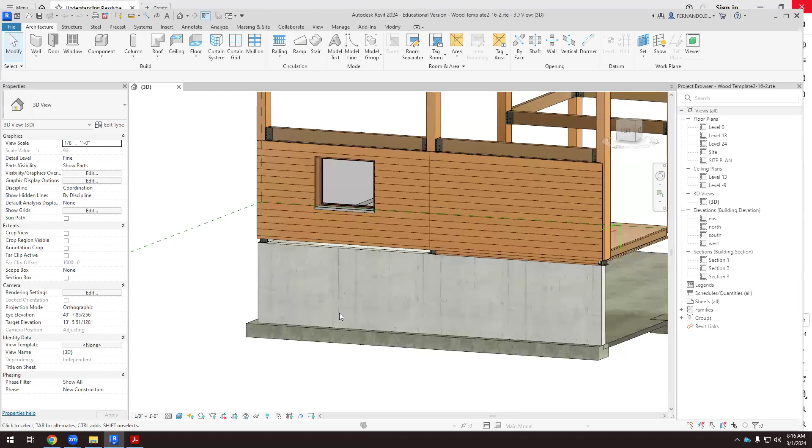This is where we finished last class. In this part of the wall, we didn't copy the floor. Of course, we need to copy this floor here because we added some details, so that we don't have this gap.

If we want to see what we did, we can always work with the section box. If we place the section box and drag it, here we can see all the elements that we have in this section.

Remember that this is the board. This wooden element is at the top of the concrete wall. That's the concrete wall, then we have this wooden element.

On this element we place the joists, the structural joists that are placed just on that element. So here we have the joists and they are resting on this wooden element.

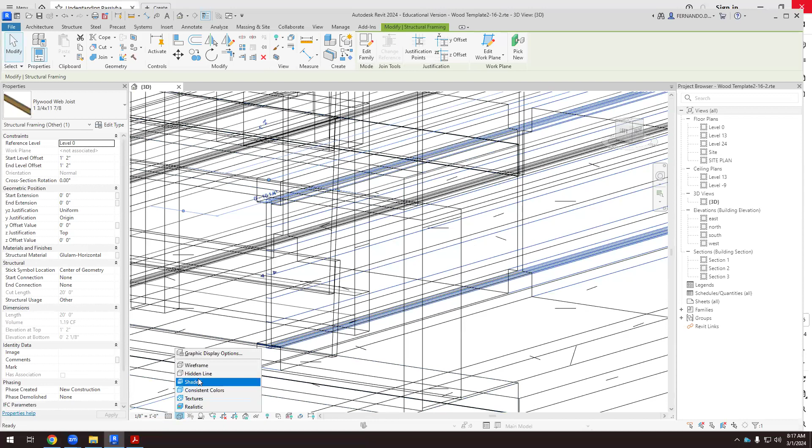Then what else? That's the cellulose. I'm going to use the realistic colors, so that's the cellulose between joists. And here we wrap the joists and the cellulose with this rigid insulation layer.

We have this rigid insulation so that we don't have a thermal bridge here. Then we cover the thermal insulation because it cannot be exposed to the outside. We cover this with this wooden element.

Then the wall, remember that we had the column, the glue laminated column. Then we have these horizontal elements that are nailed to the column. Between the horizontal elements, we have the thermal insulation.

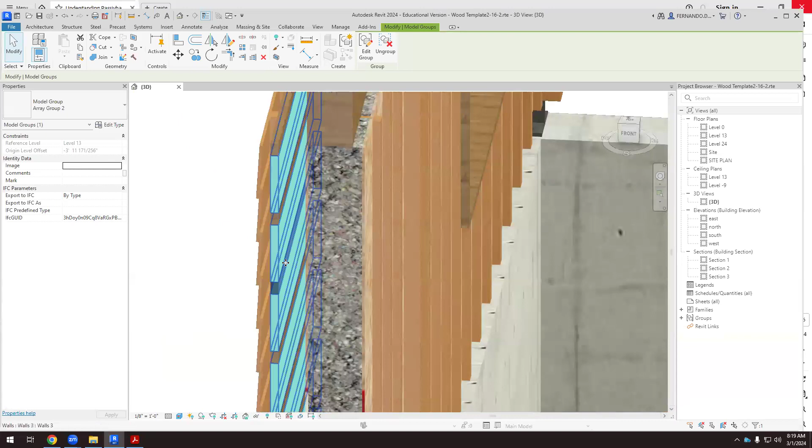With this, we prevent the thermal bridge from happening. If we look at the floor plan view of this, you see how the structural column is not in contact with the outdoor air.

So we have this thermal insulation element, which is not exposed to the outdoor air. We have this 2-inch thermal insulation, or 3 inches, I don't remember.

And then we need these vertical elements nailed to the horizontal ones. We have the air cavity. If you see, that's the air cavity.

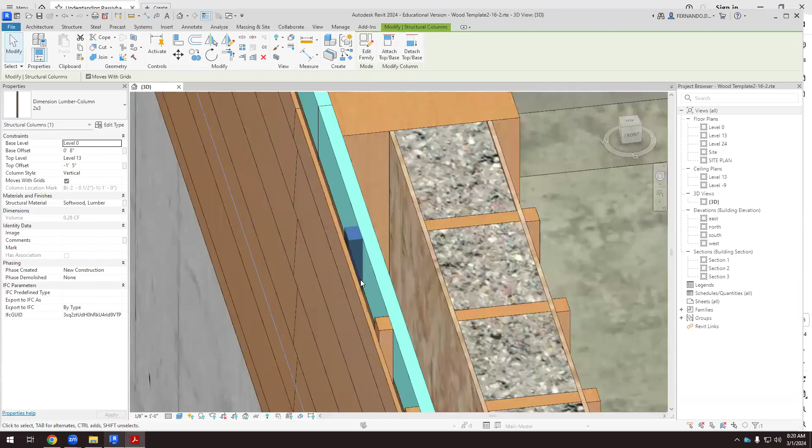Now we can nail the siding to those elements. In this case it's slightly different because the siding is vertical, so I have to nail the vertical siding to horizontal elements. In our case, we have created a horizontal siding, so we are nailing the horizontal siding to vertical elements. But the idea is the same.

We need something, and we can nail the exterior siding to that element. If we have something horizontal in the siding, this element has to be vertical. If the siding is vertical, then those elements will be horizontal. But it's the same idea.

So what do we have to do now? Well, first we should copy this floor, all these elements, to this part of the wall. If I'm copying only the floor, I can select all these.

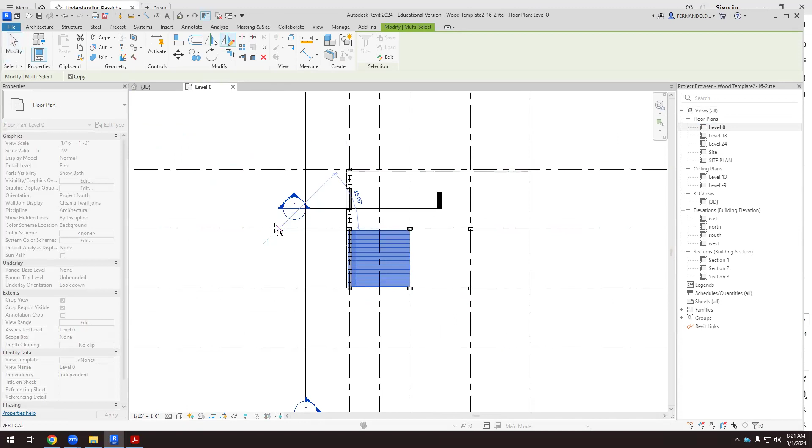Now, on level 0, I have selected all these joists and floor, and I can mirror this axis here. So now I have copied the floor that way.

There is a gap, so I have to fill this gap with another board. You see that we have a gap here, so we have to continue this gap. We need more thermal insulation, and we probably did this with edit extrusion.

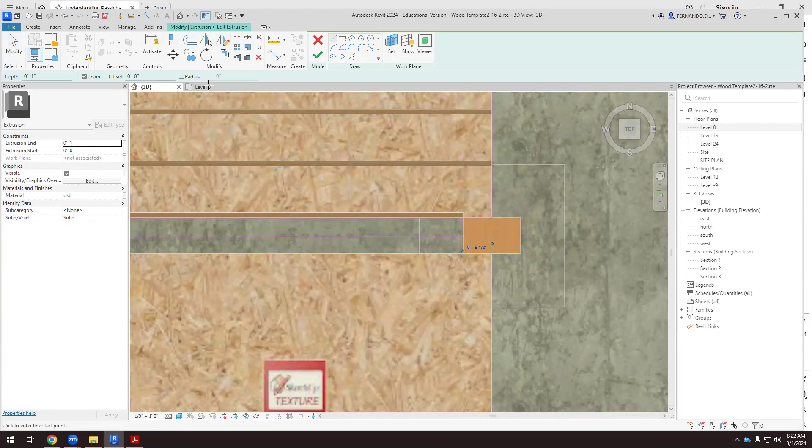If we did this with edit extrusion, I can go to the top, then go to the midpoint here and here, and now I trim. I'm going to use the hidden line because it's easier.

What I'm going to do is cover this gap that we had there, by just changing the extrusion and doing it this way. I click finish, and now you see that I have closed that gap.

I have to do the same with this. So I edit in place, click here, edit extrusion, and then trim. There you go.

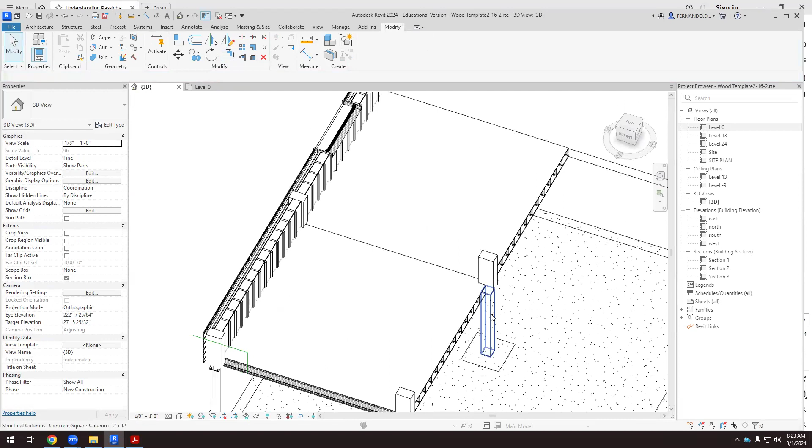Now we have a floor that is done. I have to do the same in the bottom OSB boards.

And finally, I have to fill that gap with thermal insulation. Which gap? This one. You see that we have this cellulose, and we have cellulose here, and there is a gap without cellulose there. So what do I have to do? I can edit in place, I think.

If I select this and edit extrusion, yes, I can always add a new element made of cellulose here.

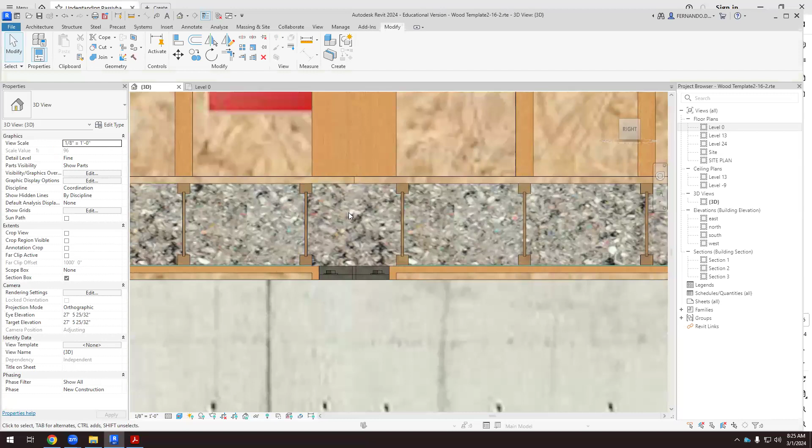There you go, finished model. Now I don't have a gap because I have continued this board. I've filled this gap with cellulose, and now I should do the same with that board.

I continue this board here at the top, so we need to continue this board at the bottom. But at least now, we have a continuous floor.

This is the first floor, that's the basement, that's the first floor. And if I look at this, here we have another nice gap that we have to address. So we should close this here.

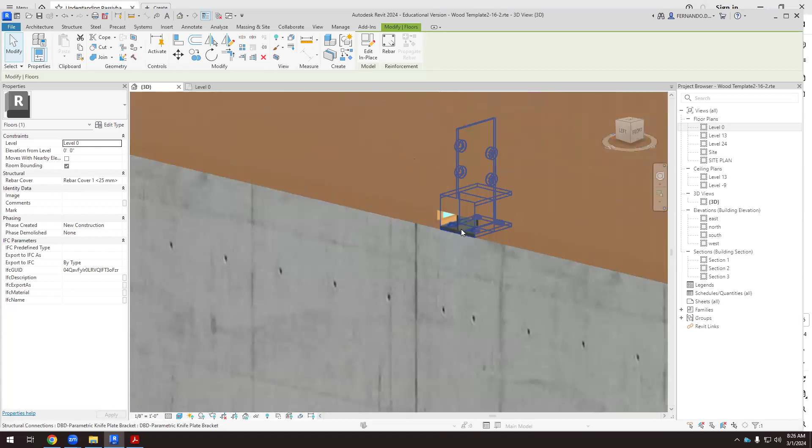So there are a lot of things to look at. There is always something that shouldn't be exposed to the outdoors, so I will have to fill this. But at least now we have the floor here. So why am I doing this?

Because now I want to copy this floor to the second floor. In this building, we have the basement, the first floor, the second floor, and then we're going to have the roof.

I'm going to extend the section box so that I can see the whole structure.

Now I have to copy everything to the second floor, including the wall and the window. Imagine that on the second floor we have the same thing: a wall or part of the wall without the window, and the window on the other side.

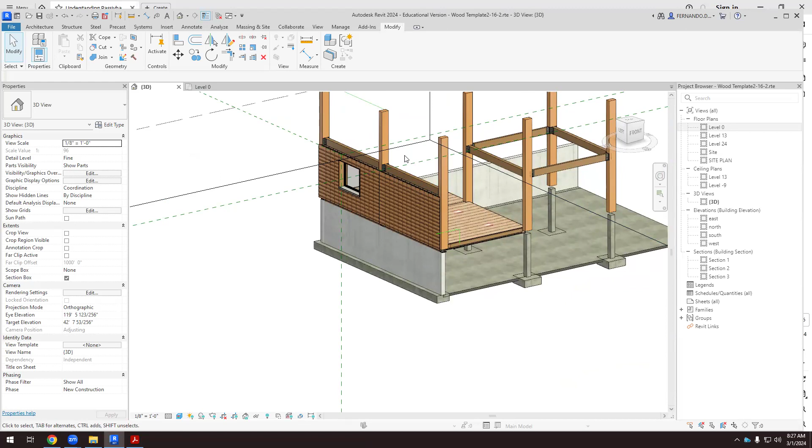So we're going to copy everything, and we have to put it above, over this beam. In this case, the structural element is the concrete wall; in this case, the structural element is the beam. So these joists have to be resting on that beam.

Okay, let's try to do it all at once and see what happens. So I'm going to copy everything, the walls, the beams, and the floor. I have selected everything.

I don't need these elements, because this is the transition between the concrete and the wood, but we don't have this transition element on the second floor because we only have wood. So I'm not copying this, but I'm copying everything else: the floor joists, these beams, all the wall with all the layers, the window, everything we did.

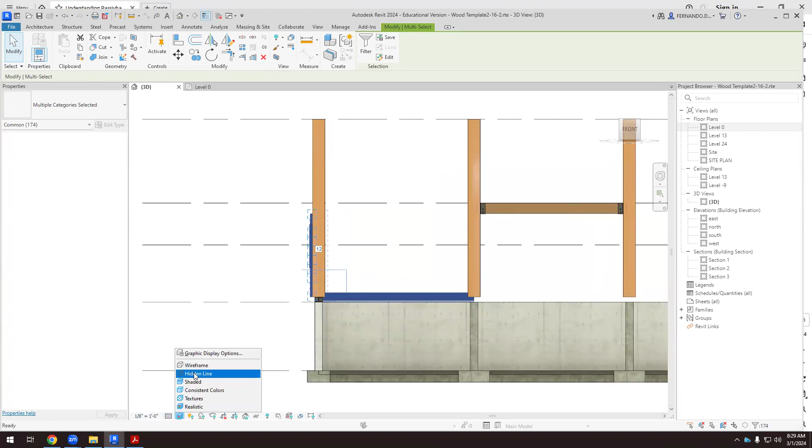Can we copy that? Well, I'll try. Let me see where we are. This is the hidden line, this is the wireframe. Okay, so I have to place the joists over this beam here.

So I have to copy. I have to remove constraints. I'm working on the 3D, on the front view of the 3D layer. I have selected everything, and if I go up, I have to go to this level and see what happens.

Takes time because there's a lot of stuff there. Okay, it's not bad. As we can see, on this beam, I have created this other wooden element. Then we have the joists and all the thermal insulation. So I have everything there. Well, everything.

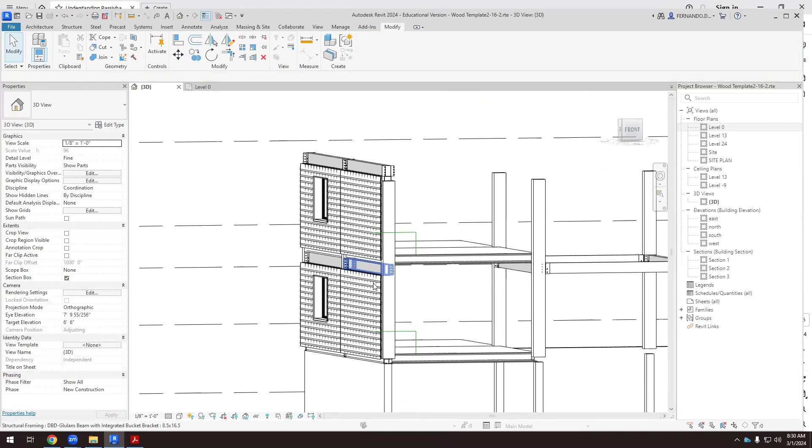Not really, because I do have a gap here that I have to fill somehow. But most of the things are copied there.

Do you have any trouble copying all this? Nope.

I think I have to change. I'm going to open the west elevation, no, the south. Okay, on the south elevation, I have to change that level.

I have to, because when I created the levels, I didn't know what I was going to do. So I'm going to move this level at the top of this beam. That makes more sense.

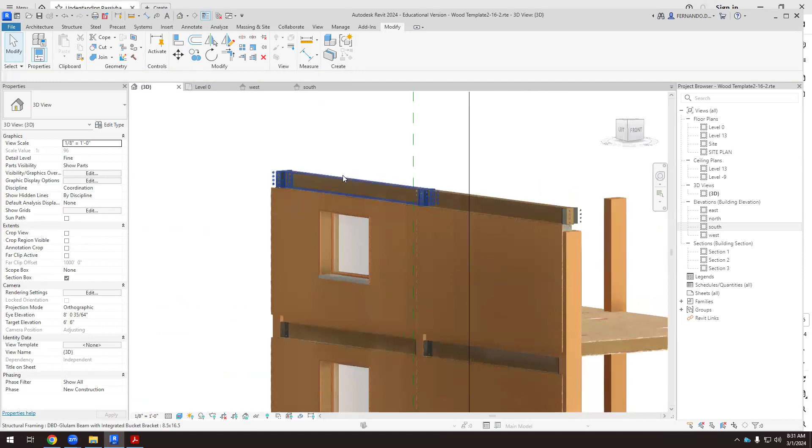Now this, the last level, is at the top of this beam. This is where the roof is going to start.

So yeah, we have this issue here. How can we fix this? Well, I'll fix it later. We have to fill this with some thermal insulation, and then we have to continue the siding all the way down.

I'll do it later. But there is a gap here that we have to fix. But now I want to start working with the roof. So if we have the roof here, we have to, okay, so this column...

Well, there is something weird here. Okay, so I copied that. Oh, okay. Sorry?

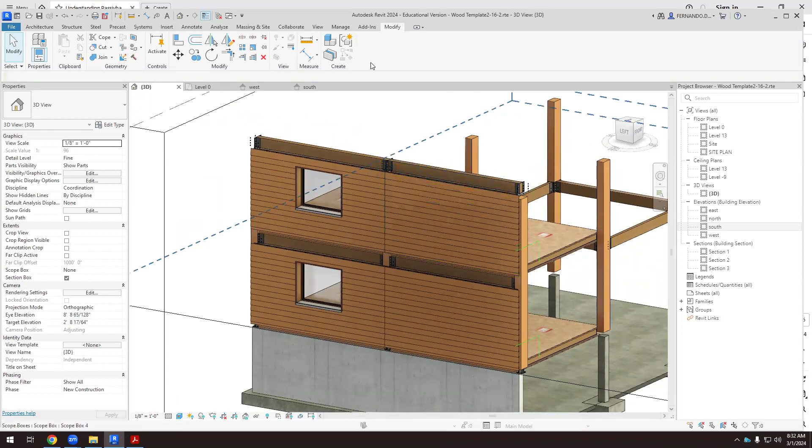I'm going to go to View, Plan Views, Floor Plan, and I want to work on level 24. That's going to be my roof.

I don't see anything, and why is that? Because the view range is not the right one. If I open the view range, it's associated to level 24, so everything is underneath level 24. So I'm going to move it, or give it an offset like -2 feet and -2 feet.

And now I see all this stuff. The view range, if we don't see anything, you have to open the view range, and the bottom and the depth, you have to go down, okay? Because if you see only at level 24, everything is underneath level 24. So you have to go slightly down 1 foot, or I went 2 feet down, but it can be only 1 foot.

And apply. Well, 1 foot is not enough because I don't see a lot of stuff here, so I'm going to go 2 feet down. And now at least I see where this is the beam or the wall.

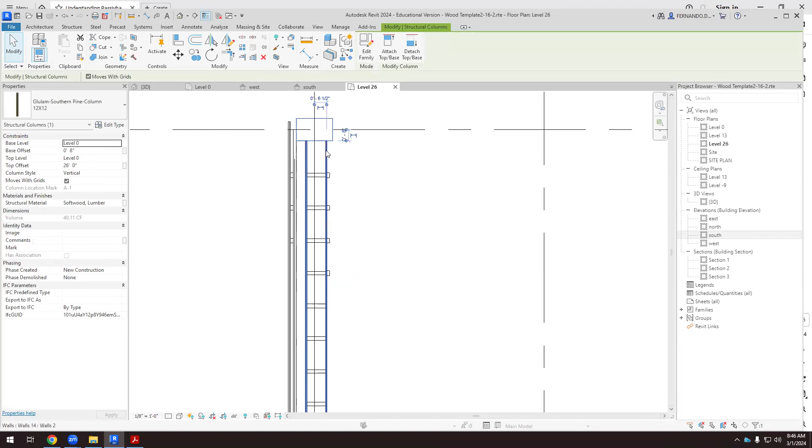Well, in theory, the beam is going to be here, okay? So that's the column, and that will be the wall or the beam. But what I know is that I'm on level 26, and I have to place the joists in this position. And where are the joists? Well, I have these studs, and everything has to, it's not mandatory, but if all the structural elements are lined up, it will work better, okay?

So, yeah, I'm going to use the joists, the same joists that I use for the floor, but I'm going to place them at the top of these studs.

Okay, so what were the joists? You have to go to Structure, Beam, and we had the plywood web joists. This one, I don't know which one I used for the floor. Let's use one of them, this.

And now I'm going to place it. You can start at this grid line, and we go all the way there. Okay, so that would be the joist.

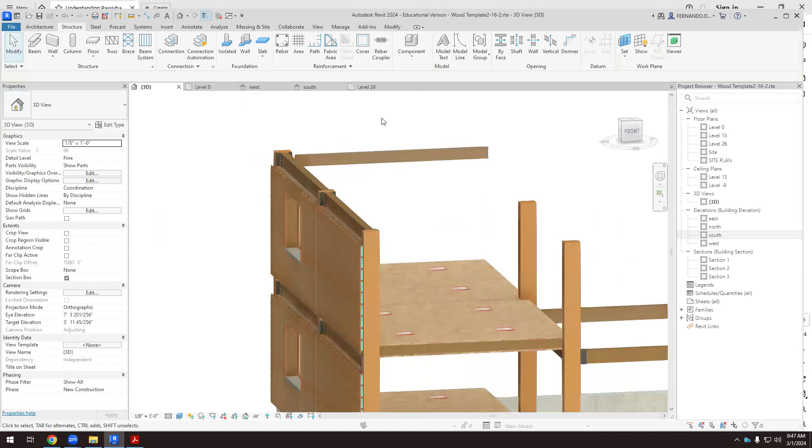If you go to the fine detail, we can see more. And that joist is there. And it's horizontal. And you see where it is.

Okay, so this doesn't work because I have to place it. I'm going to use the hidden line. Okay, if I'm using hidden line and I open level 26, well, the joist is not placed at the top of the beam. So I have to drag it.

I have to start the joist there. Okay, so I have to make sure that it's at the top of the beam, and I would drag it even at the edge of that beam if I could. Apparently I can't.

See if I can do it. Nope, doesn't let me, okay, interesting. But now it's entering the beam, so I have to move it up. Okay, so I have to take this.

I will try to move it because it has to be resting on the beam. So remove constraints, I move it up. Okay, that makes more sense.

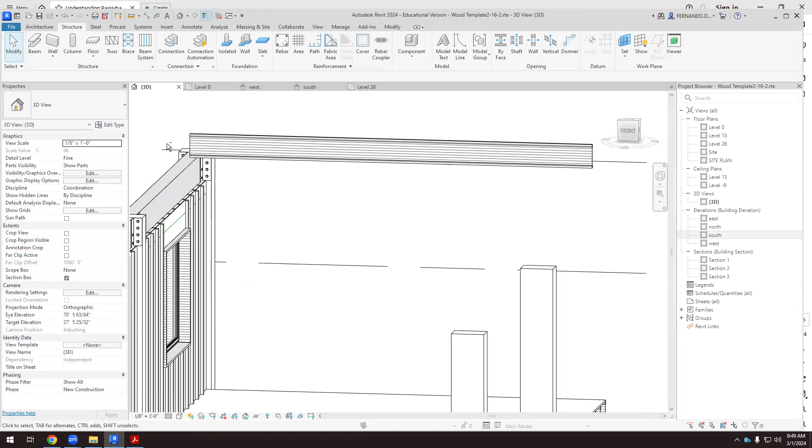Because now this joist is leaning on the beam. Do you have any issues with that? Okay, so that's it, the joist has to be at the top of the beam. This is structurally what should happen.

But now, if I'm creating a roof, I need to tilt that joist. With a floor, it can be horizontal, but now it's tilted. So how can I do that?

If I select this, you see that I have a lot of information here. This is the base, okay, so this is where this element starts. Okay, so I have moved the beam up 10 and 1/4 inch. And in this case, it's like this.

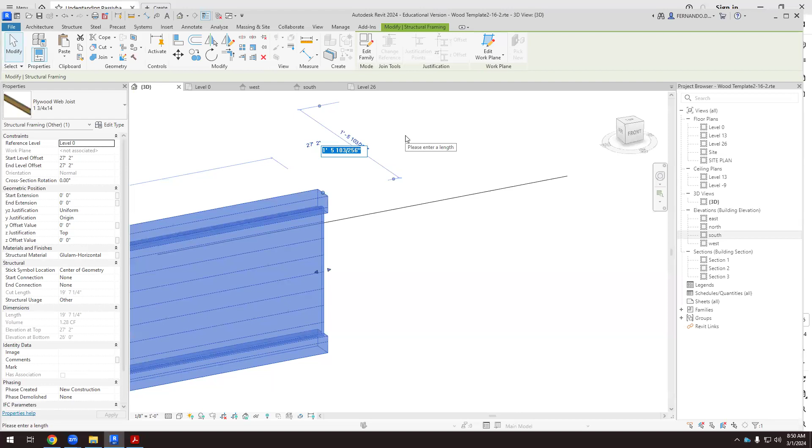Okay, so what if I change this value? Will it change? In my case, it's 1 foot and whatever. So if I click here and make it, let's say 6 feet, what happens? Nothing. Okay, so this is not what I want.

So this value, okay, it's the distance between this and that. I think it's this value, the one that I have to change. So this elevation is 27 feet 2 inches. Okay, so let's make it 36 feet. And yeah, this is what I wanted.

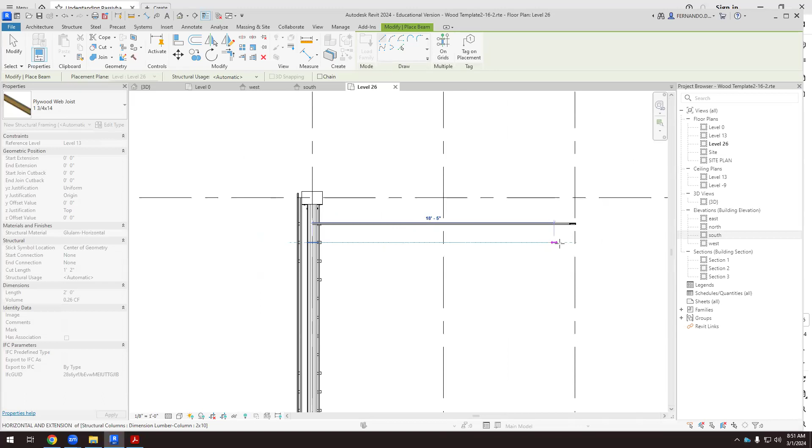Okay, so do you see what I have done? I'm going to do it again. So I'm on level 26. I place a joist, I select beam, plywood joist. I start here, and then I go all the way there. So now I have a joist.

The problem is that this joist is not at the right level. So what I have to do is go to level 26 again. I have to drag this to that point. Okay, so now it starts in the right point.

And in the south elevation, or in the 3D view, I have to move it up. Okay, so it has to be above this level. So I select this, I move it, remove constraint, and the bottom of the joist has to be above this level.

And now, if I want to tilt it, I have to select the beam, and this number, it's 27, that's the elevation of that point. So I have to change that elevation to 36, and now it's tilted. Make sure that, yeah, it's tilted.

There's a problem here because if the joists are different in length, well, the joists were different in length, so that's why I've changed the elevation, but they don't match. Anyway, I did it, so if I want to make sure all the joists are at the same level, it's better if I select this one and copy.

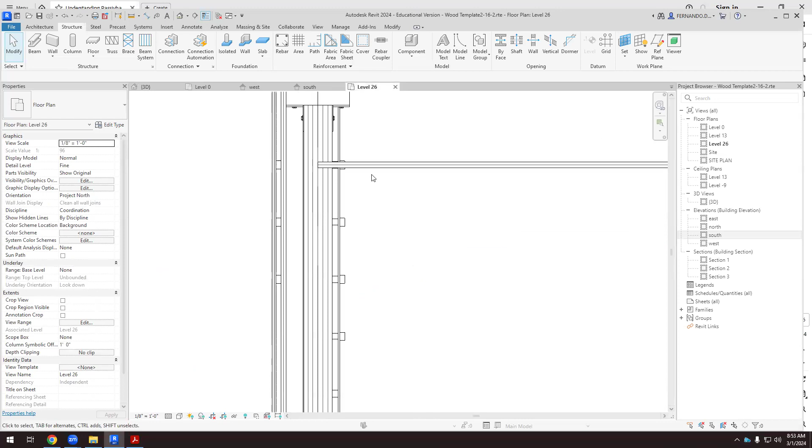This one here, and then on the 3D view, the joists are the same. Okay, so I did it again so that you know what to do. But once you have created the first joist, tilted one, then you have to copy instead of creating another one and tilt it again. If you have tilted or made the angle for one of them, you'd better copy, and we can keep copying.

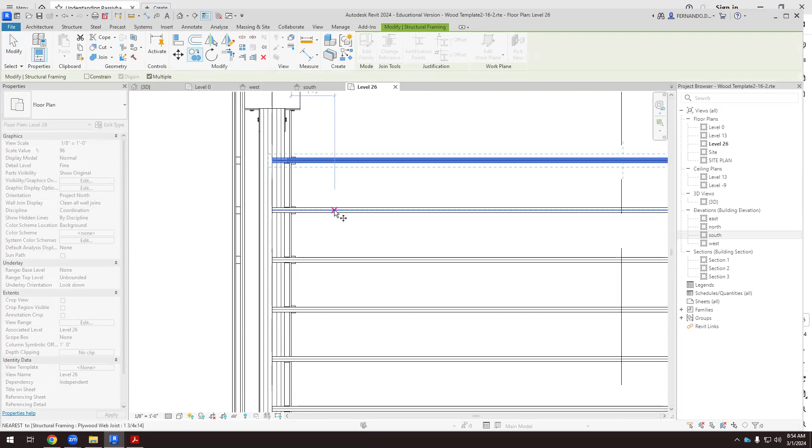Now, okay, I think the first one should be here. Yep. And now I'm going to copy all of them. This is gone. Copy. Okay, and now I'm going to copy or mirror all of them.

I'm going to use mirror here. And now it should, yeah. So I have all the joists there with the same tilt, or it should be the same tilt.

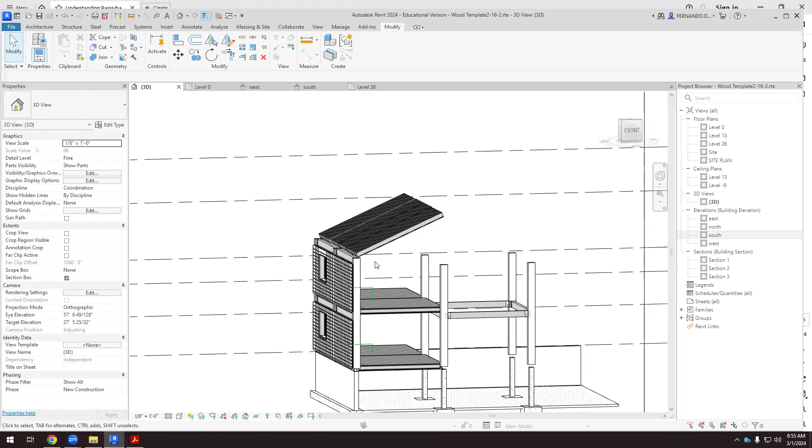Okay. I'm not very happy with this because as you can see, it's not leaning on the beam itself. So is there a way to change that? And some of the, okay, we have to be careful because some of the joists are not in the right position.

Probably when I copied it, okay, I'm going to do it again, because when I copied the joists, I wasn't careful enough, and probably I made some mistakes. Okay, I'm going to do it again, but making sure that when I copy, I don't change the angle, because the angle is important. Okay, so copy this here and here and here.

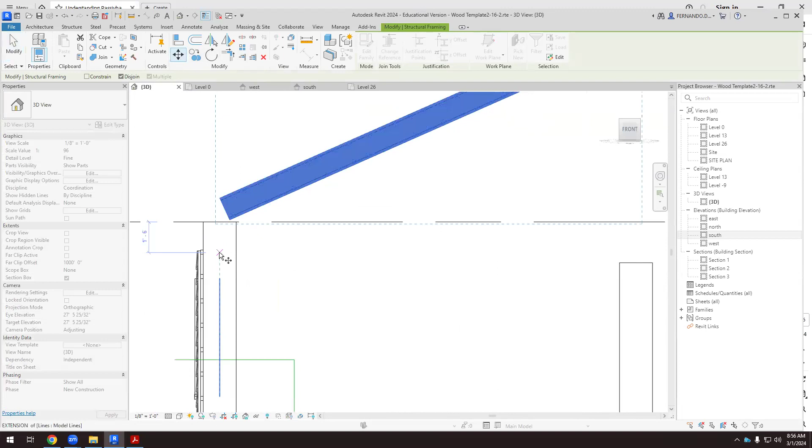So I'm going to check that so far we are good. Yes, we're good. So now that I have only a few of them, I'm going to try to move them in this direction. Okay, so I'm going to move the joist in this direction. Yep, that works better because now it's leaning on a structural element, or at least it's at the top of a structural element. Yeah, I think that will work better. Okay, and now I have to keep copying.

I'm going to select two of them and copy from this point to this point. Yep.

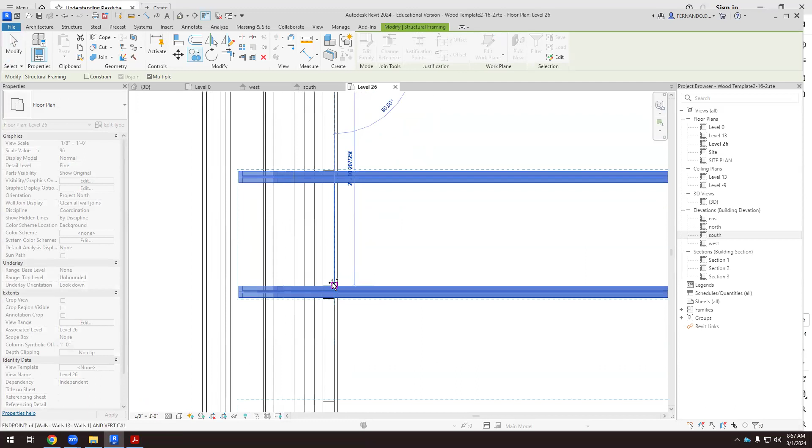And now let's make sure that everything is correct. Yes, so all the joists are at the same level. And now I can mirror. Okay, so all the joists, they are here. And you will say, okay, but there's a gap, what the hell? Yep, so that happens when we have something that is horizontal and we have something that is tilted.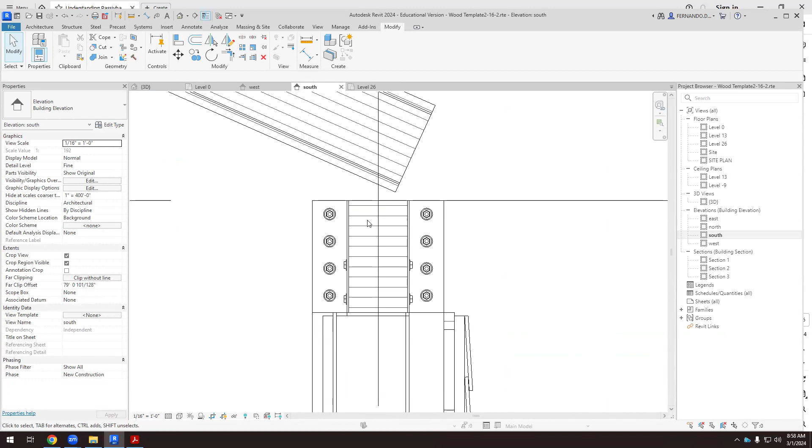The connection, yeah, I have to create like, this is something that I don't find in this detail, because we don't have a section through the joist. We have a section through the thermal insulation, but on the structural front, I need to connect the beam, that beam here, to these joists. So we will need something made of wood, specifically with that shape, so that I can connect the horizontal beam and the joist. So this can be, I'm going to create an architecture component model in place.

I'm going to, this is a structural framing, yeah, because it belongs to the structural elements. So structural framing, okay, and I'm going to create the extrusion starting on grid. I need one of, if those are numbers, the reference plane or the work plane has to be one of the letters. So I'm going to create this on grid A. I'm going to create extrusion, and I'm going to create a triangle like this.

Okay, so this element is something that connects the beam and the joist. In the real world, we will need that triangle because we can't rest the joist on something that is horizontal. So we need this kind of base so that I can nail this element here, and I can nail this element to the beam.

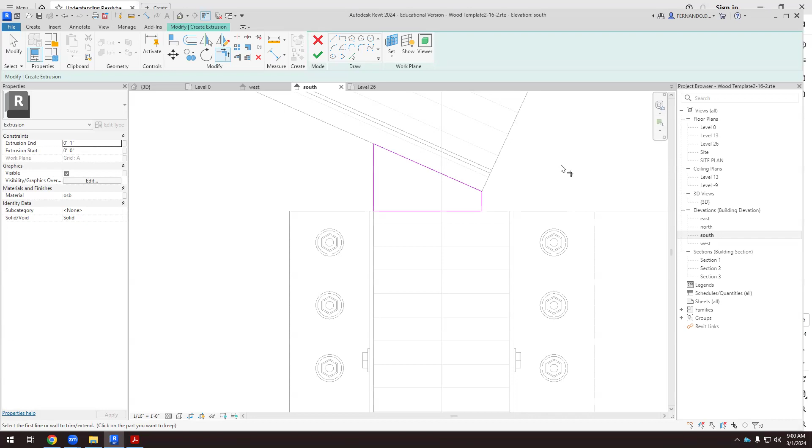Okay, so that wooden element is connecting the joist to everything that it's horizontal. If I change the realistic view, yes, I have this element here so that the joists are resting on something solid. And this solid thing is resting on the beam itself. I didn't do it.

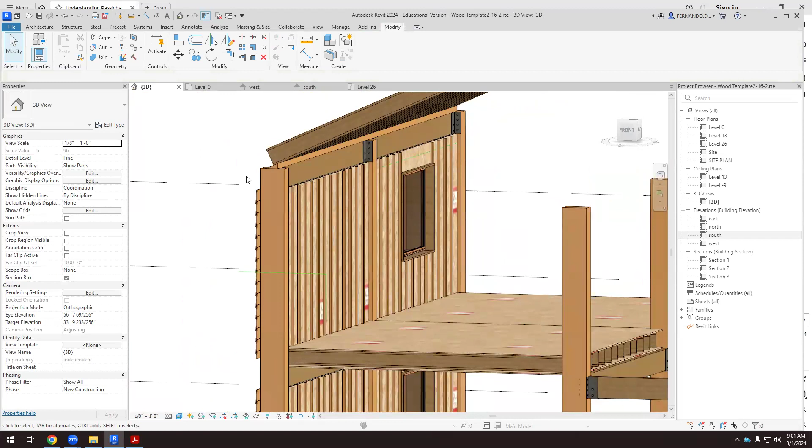Okay, so this works well, but when we're working with these wooden elements, we have a lot of small pieces that you need to include to connect everything. We are virtually creating the 3D model, but we realize that we need something to connect this joist to this beam. That's the element we need here.

Okay, so now we have the joist, we have the wall. Structurally, we have connected the elements, so now it can stand. What do we need now?

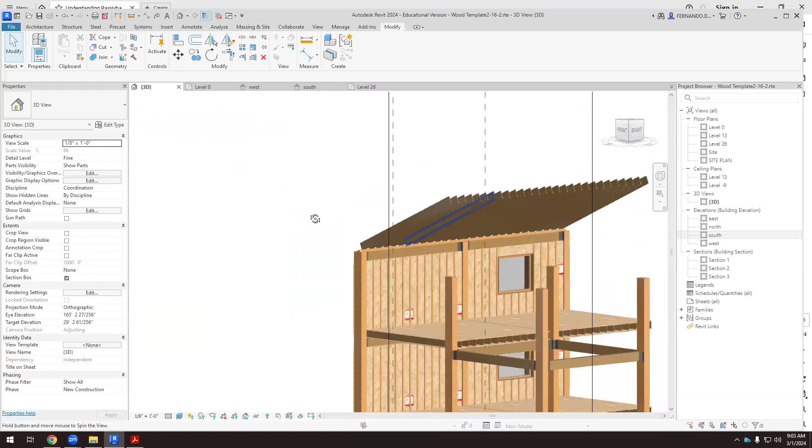Now we need the thermal insulation, because we don't have any. That's the roof, and the roof needs a large amount of thermal insulation. So what can we do now?

You remember that in the floor, we had thermal insulation, but just here. Because if the basement is at the same temperature as the floor, and the same temperature as the second floor, we don't need thermal insulation here. We need thermal insulation to prevent the thermal bridge where we have the roof to floor connection.

But in the roof, this is not enough. We need thermal insulation between the joists, and this has to be continuous. This small distance isn't enough, because now the roof is what separates the indoors and outdoors. So we need the thermal insulation here.

So what would I do? I think I'm going to create a component, model in place. I'm going to use extrusion to fill the gap between joists with cellulose or glass fiber, or whatever we need for the thermal insulation there.

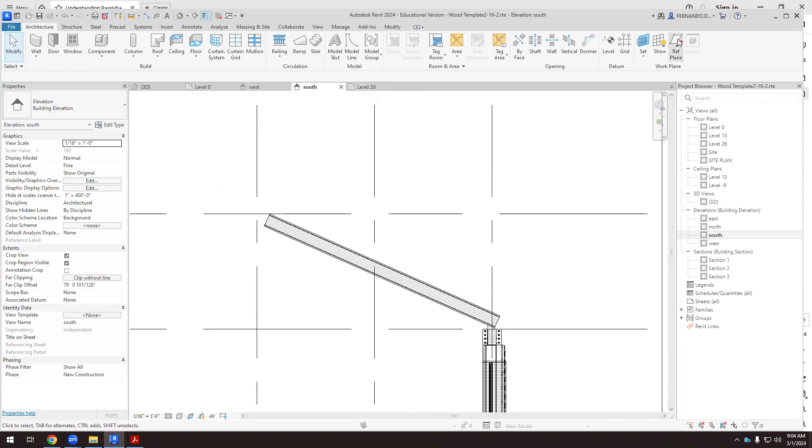But what is the tilt? I'm going to use a reference plane with this tilt. I'm going to go to architecture - you have to do this from the elevation. If you use a 3D view, it doesn't work, so you have to create a reference plane from the elevation. I'm using the south elevation, creating a reference plane, and following this tilt.

And I name this roof insulation. So I'm creating this reference plane, roof insulation. And now on the 3D view, I need the roof insulation here between the joists. So on the 3D view, I can create a component, model in place. This has to be a roof because I'm working with the roof - it's a roof component. I'm going to set the work plane at this roof insulation reference plane that I created.

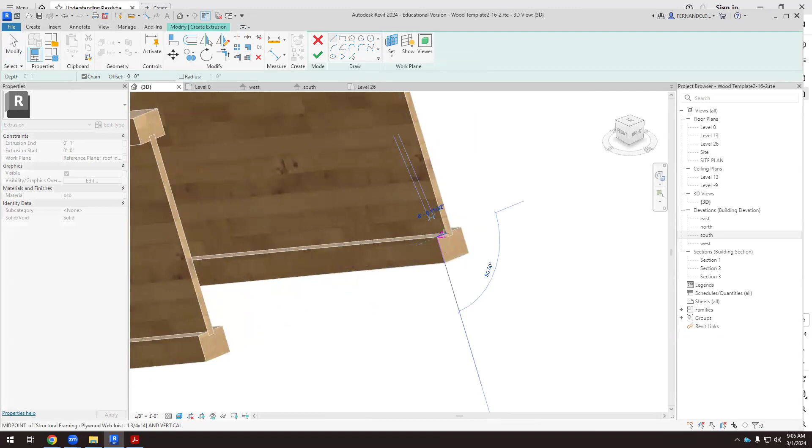And now I'm going to use extrusion, and using extrusion, I'm going to trace the shape of this joist. There you go, make sure that it's closed - I think it is, yep. I'm going to click finish to make sure that it works. Yep, you see that it works. Okay, so that's exactly what I want - I want to fill this joist cavity with thermal insulation.

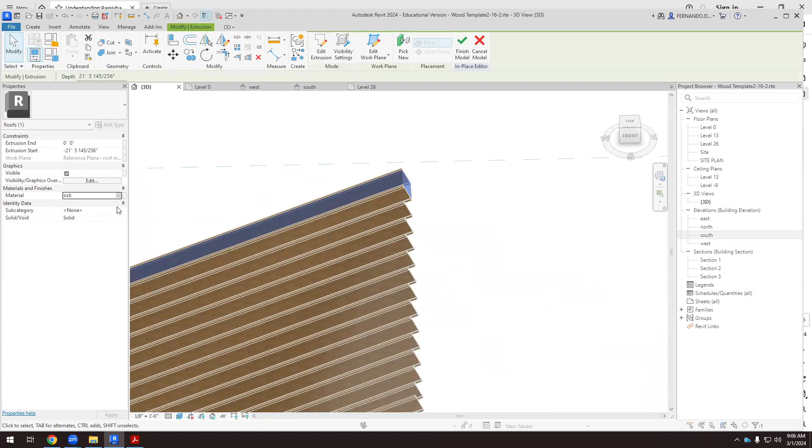Yep, and this is not OSB - the material is cellulose. Okay, so the material is cellulose.

And before finishing the model, I'm going to edit extrusion. I think I'm going to copy - I can copy the extrusion, the solid itself, but I think it works better if we copy the drawing. But I have to find a reliable point that I don't find. Oh, there. I can do another one again.

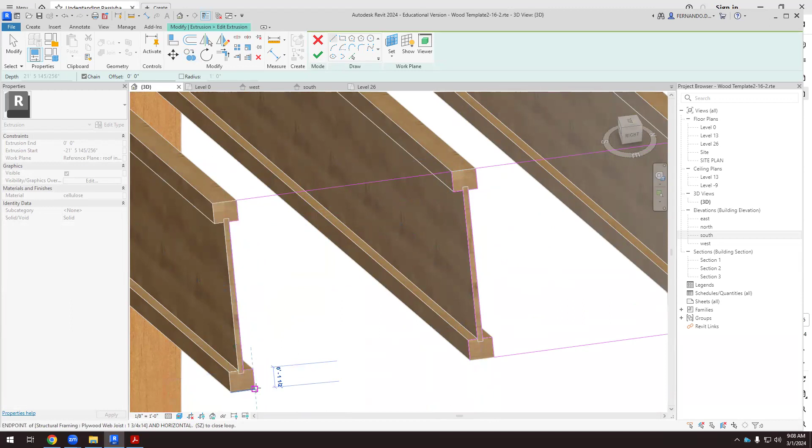And now can I copy this shape to the following? No, I can't find a reliable point. Okay, so I'm going to click finish. And can I copy this now? No, I can't - look, finish model. So if I do this and copy... come on. I need to find something I can rely on, maybe here. And then can I go this way? Oh, kind of.

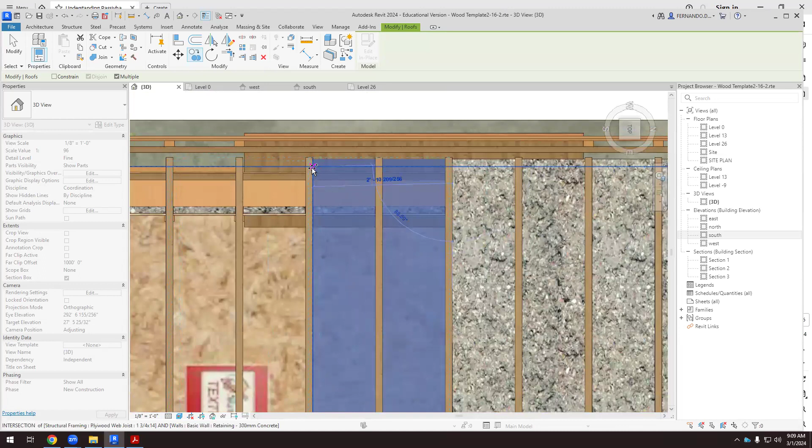Okay, so keep going - the idea is that we fill all this with cellulose. We have the joists, and the space between joists has to be filled with cellulose. We can keep going, but all the spaces between joists have to be filled with cellulose. So looking at the model, I have created the joists and filled the space between them with cellulose.

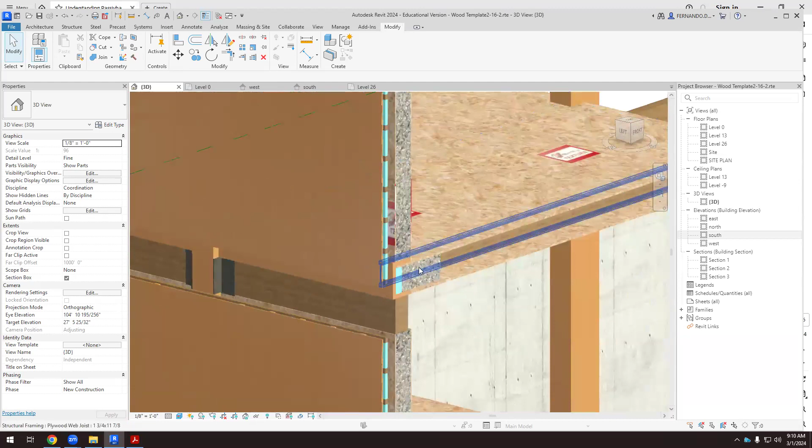Are we done? No, not at all. Because what would be next? If you remember the floor, we have the joist, we have the cellulose, and we have board at the top and bottom. So we need two OSB boards, at the top and at the bottom of this element. That's what we have to do now. I can create the board using the same reference plane, but it has to be a component, model in place. So I'm going to create architecture, component, model in place - it's a roof.

Okay, I have to set the work plane on the roof insulation. I can use the same reference plane. I click OK, and now if I select extrusion, I can start at this corner, at this point, and go all the way to the end of the roof structure. The thickness, if I go up, can be 1 inch or ½ inch. I don't remember the thickness I used for this board. Probably ½ inch is better.

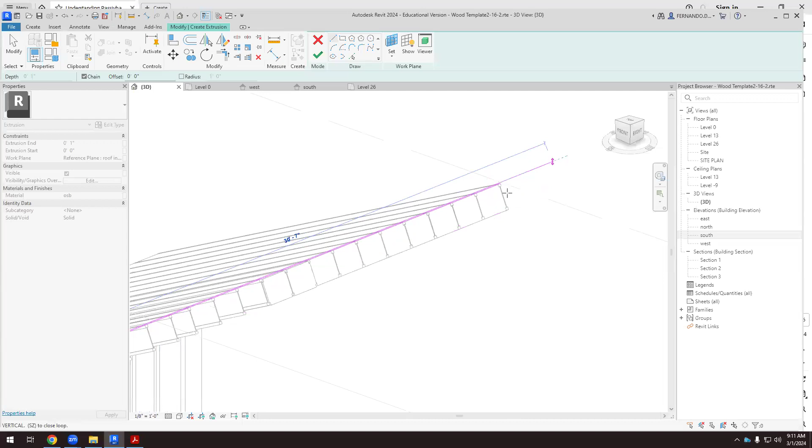Okay, so click here, ½ inch, and now go all the way here and close it. Finish. Material is OSB, so it's the right material. And now I have to drag it all the way down, up to this point. Okay, so I have created this board. It's made of OSB.

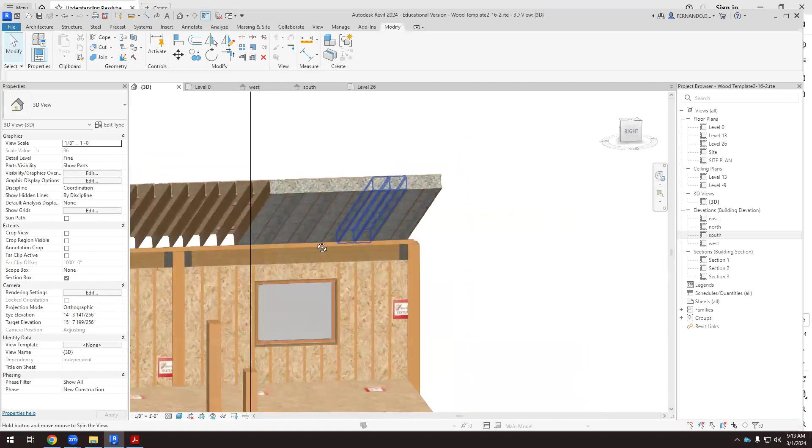Okay, and now I need exactly the same, but at the bottom of the joists. If you remember, the floor is exactly the same: we have a board, joists, and board. So in this case I have the board here, then the joists, and then I need another board at the bottom of this. So I'm going to do it again. I'm going to create another component, model in place, OSB. I'll use the same reference plane, but now at the bottom of these joists. Okay, so let's do it. Architecture, component, model in place. This is roof.

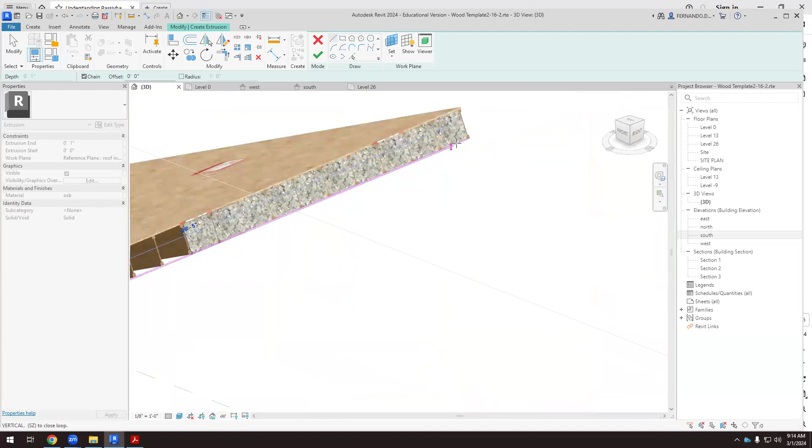Set the work plane at roof insulation and extrusion. And now I'm going to start here, there, ½ inch down, and then all the way here and there. I click finish, check the material, it's always OSB, and now I have to drag it to this handle. Yep, all the way down, up to the south elevation. Yeah, I have to go up to this triangle that I created here.

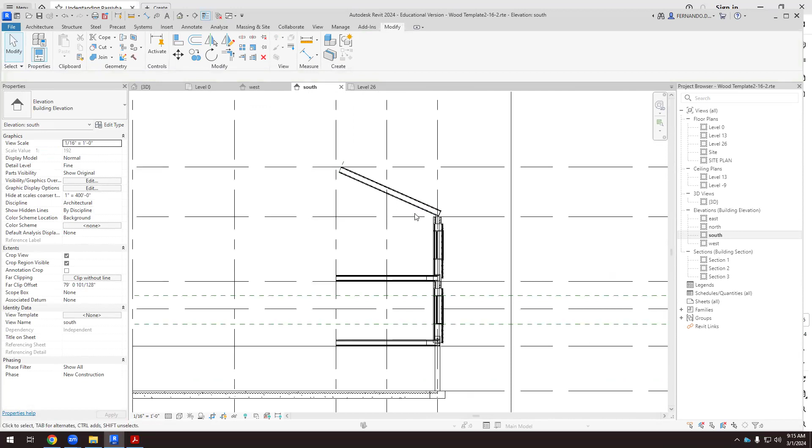Okay, so now we have the OSB there, and we have the OSB on top. We have to fill all these spaces between joists with the thermal insulation. So we are on our way to do that. If I use the section box to see what I'm doing, and then I use the front view, so now we see where we are. Okay, so we have cellulose here, we have cellulose here, and we have a huge gap without cellulose. The goal is that we have to wrap everything with the thermal insulation.

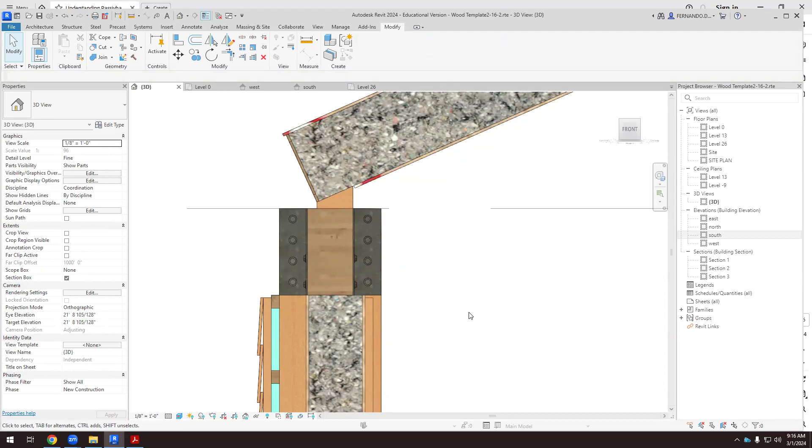But I told you in this detail that we are looking at, we don't have the structural elements. When we have structural elements, solving thermal bridges is more difficult, okay? Because we have a solid thing here, and we can't get rid of the beam because it's a structural element. So we cannot go with the cellulose through the beam. So what do I have to do? The goal is to wrap everything with thermal insulation.

So yeah, we have to figure out how to do it, okay? But the thing is that we need to continue the thermal insulation. We cannot have a gap, we cannot have a thermal bridge without thermal insulation. So far we have good thermal insulation in the wall, we have good thermal insulation on the roof, but we have to fix always this point, okay? So we can fix it now, or we can keep going. We can create all the elements, and then fill the gaps without thermal insulation. We can fill it with thermal insulation. So let's keep going and see what happens.

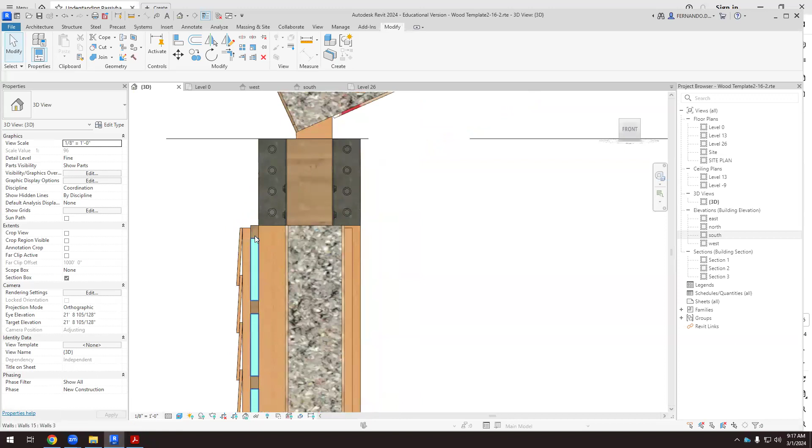Okay, so on the structural front, we have the studs. Those studs go up to the beam, so the structure is solved. And then what about this one? Those elements here, they are connected to this column. So we nail this element here to this column. So one of the things we should do is keep working with those elements, because we have to go up to the top of this beam. So I can select this one, copy it, remove constraint, and copy it here up to the top of this. Okay.

So now I have to select this 2x3 column. Well, it's not a column, I created it, but it's just like a strap to nail the siding. I have to move this all the way up, changing the top offset. If I make the top offset 12 instead of 11, it's not enough. What about 12 and 11 inches? Okay, we're getting there. So probably if I make it 13, it works.

So this is what I'm doing: I'm extending this element, and then I'm extending that one. What's the problem? I have to do this with every single vertical element that I have. Okay, but now I know the right offset to create, so I can select all of them and change this to 13, and it works.

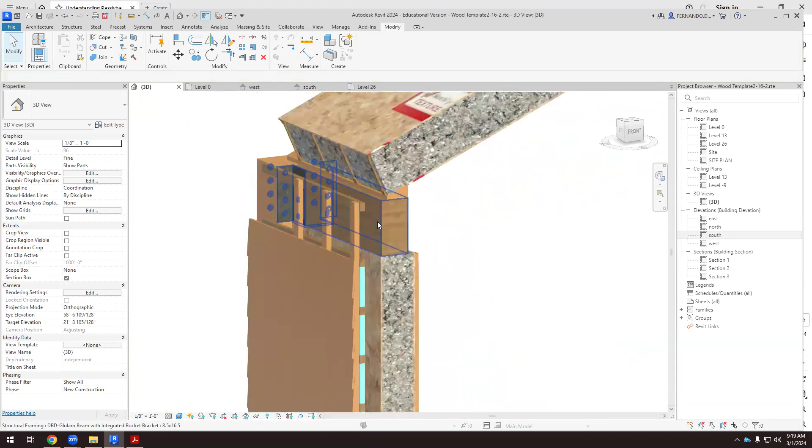Okay, so I'm doing it only in this detail, but now that works because I can move the siding all the way up. Okay, good. What's next?

Okay, so this is the board. You see this is thermal insulation. This element is a board, that's another board. And I have this OSB waterproof board, thicker than the other one, that goes away from the facade. We need this little overhang so the water doesn't get into the cavity here. So I need this element extended all the way there.

We created this horizontal element here, and then moved it all the way up. I'm going to do the same thing: create another OSB board, this one is 1/2 inch, but now I'm going to create a 1-inch board and extend it beyond the facade. Okay, let's do it.

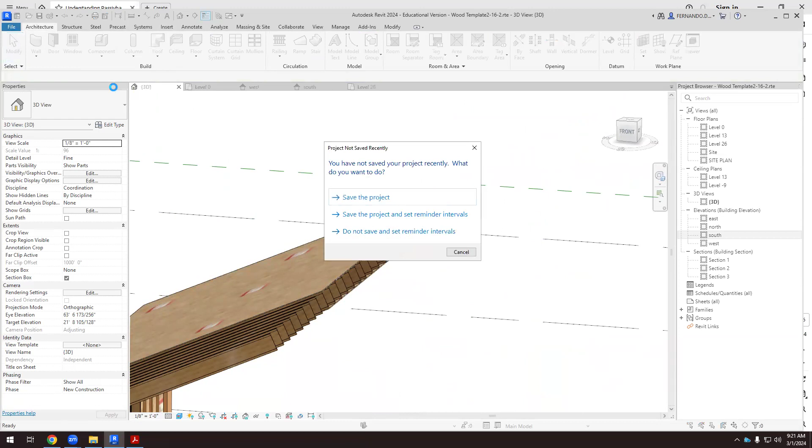I'm going to select everything, and using again the roof insulation reference plane, I'm going to create another OSB board, 1 inch thick. Let's go to Architecture, Component, Model in Place, Roof. Set the work plane on this roof insulation, extrusion, and now I'm going to create a 1 inch board.

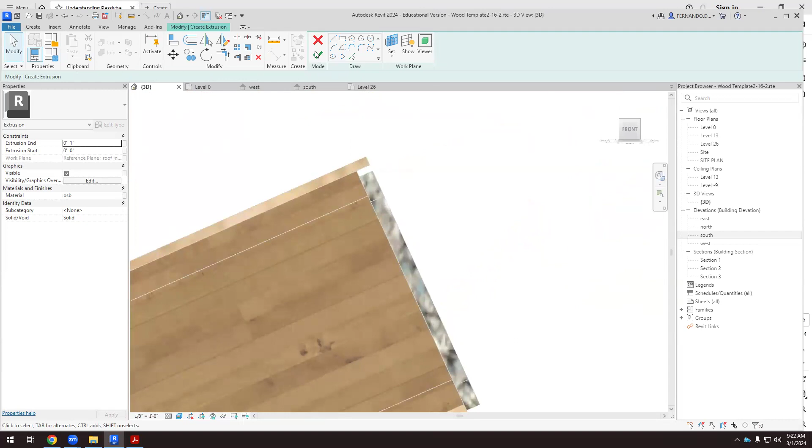So I have this thing here. Set the work plane, roof insulation, okay. Well, I think I have a small issue here. For some reason I didn't do it right, okay, let me cancel just a minute. Because I didn't start this in the right plane, so it has to be here. Okay, and now I'm going to start again.

Okay, when I extruded it, I didn't place it in the right position. I have a gap here, so it will give me some trouble. But if you do it correctly, you won't have this problem. So, Architecture, Component, Model in Place, Roof.

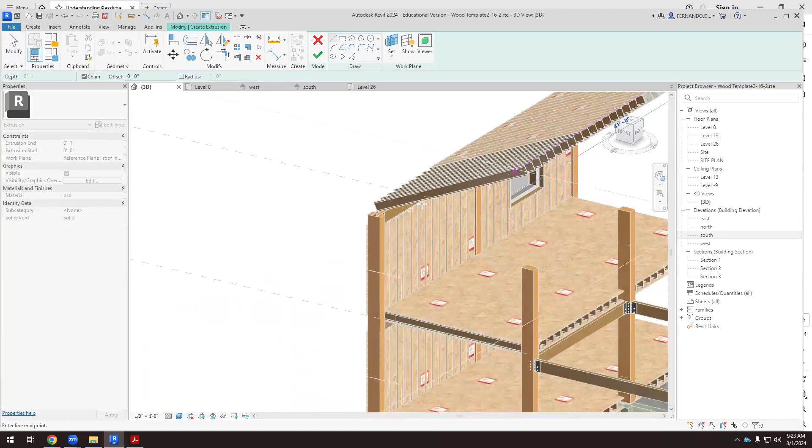Okay, set the work plane, this roof insulation, extrusion, and now I want to start here. So if I start here, I go all the way. Well, I stopped here, but you have to cover the whole roof. Okay, so I came here, then I have to go 1 inch up, then all the way there.

And there you go. I click finish, make sure the material is OSB — this would be a different, waterproof OSB — and then you extend it beyond the facade. How much? Not too much, because this is not structural, just hiding. So beyond the facade, the siding plane, this would be enough, something like that.

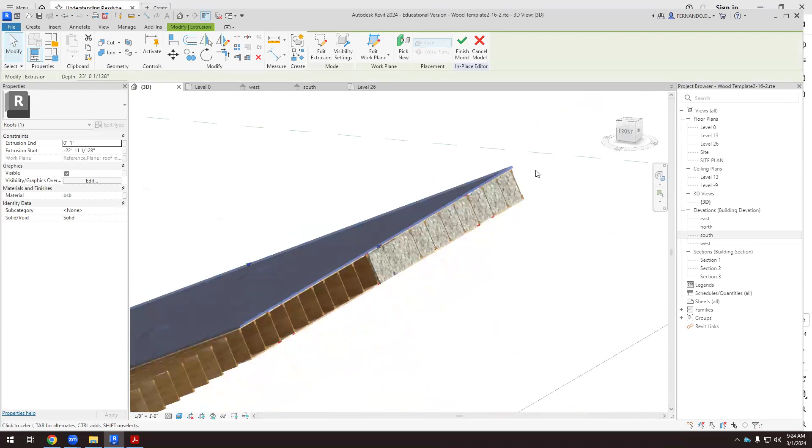And yeah, this is what I didn't do before, because I have to move it here. Okay, so now I have this thicker OSB board, and I have the thin OSB board here, the same as this one. Then I have a thick OSB board, the same as this one, and as you can see, I have these rafters placed there.

Okay, so now on this board, I have to place horizontal rafters. So let's do it. Which plane do I want to work with? I have to place the rafters here, but they have to be tilted.

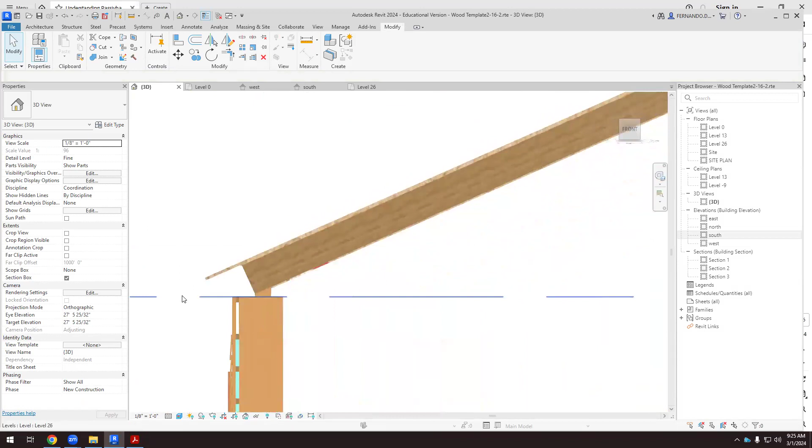I can do this with a component model in place, or with a beam. I think I'll use a component model in place, because if I use the beam, I have to place it, then tilt it, and I think it will take longer. I don't have the exact information because the distance between these horizontal elements depends on the size of the tile, which I don't know, so I'm going to make it up.

So I'm going to create a 1 foot gap between those elements, using the 2 by 3 dimensions I created before. I'm going to do this with component model in place, starting with the south elevation. I'll select one of the letters, because if on the south elevation I see numbers, the reference plane has to be a letter.

So let's do it: Architecture, Component, Model in Place, Roof. The work plane is going to be one of the letters, grid A. And I'm going to create an extrusion, 3 by 2, element like that. I want the distance between these elements to be 1 foot.

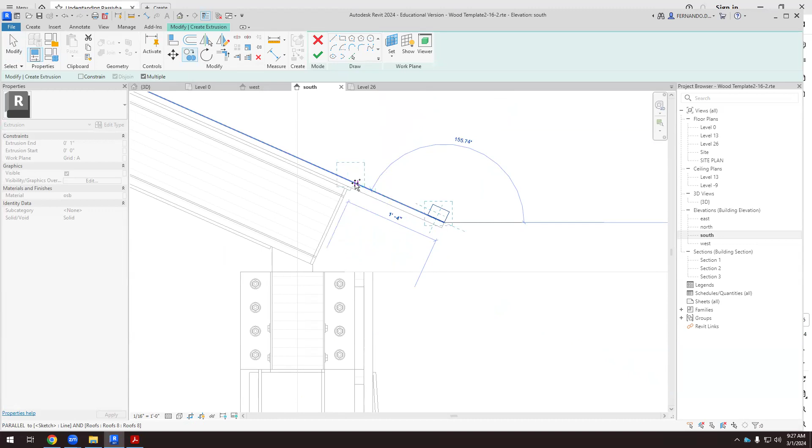I said okay, so I can go 1 foot up. Let's say 1 foot is not enough, so let's say 1 foot and 4 inches. Yeah, that looks better. And now I'm going to copy this as many times as I need.

Okay, if I click finish, select the material, and this material is now OSB. I'm going to select the soft wood again. Finish model, and then on the 3D view, I click here all the way.

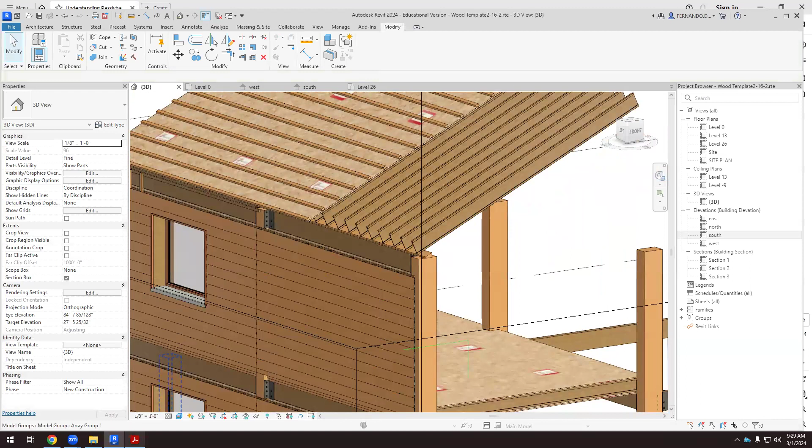So now if you look at this, I have the thermal insulation, the first OSB board, then the thicker OSB board, then these rafters, 2x3. So the same thing I got in my detail: the joist, thermal insulation, the first OSB board here, the second and thicker OSB board, and now these are the rafters.

What else? Well, I can do this. You see that we have a gutter. So what is the gutter? If the rain falls, it's not mandatory, but I think it's better collecting the water here and then having a downspout. I think it's better because otherwise the water will fall here, and it's very unpleasant if you're waiting at the end of this small overhang and all the water is falling on you. So having a gutter is better. Okay, so let's do it.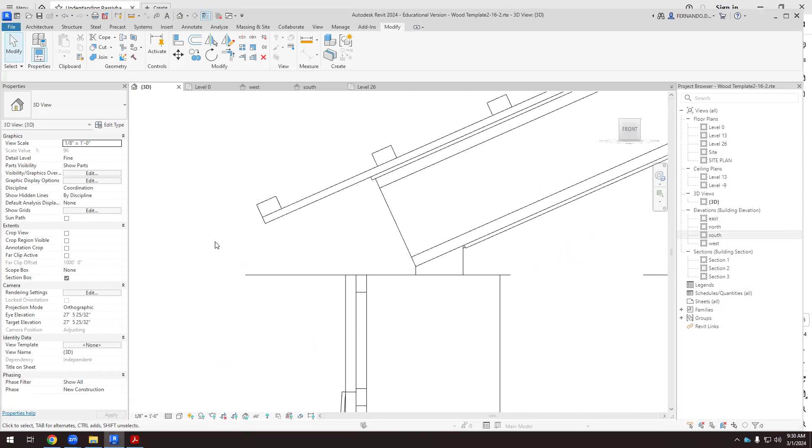We have a gutter here, so this element would be slightly above, but anyway. I'm going to create another architecture component, model in place, the gutter. We don't have this category here, so I'm going to use roof again. And I'm going to set the work plane at grid A again, and create extrusion.

So what is a gutter? A gutter is something like this, and here we have a circle. We can have like a 6-inch diameter, is it enough? Okay, a 6-inch diameter. Now I select circle, I select the center.

And now I have to trim. Well, I can split the element here. I can split the circle here and here, get rid of it. And now trim this and this, and yeah, that will be enough.

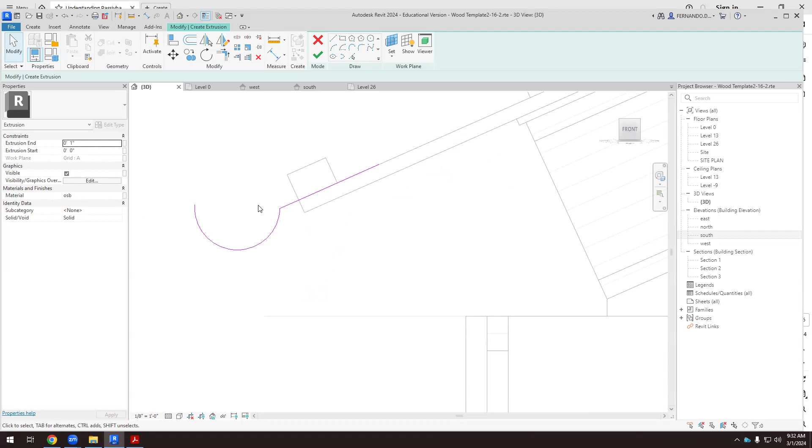And now I need a thickness. The material for gutters is usually lead or zinc, something very thin, so I can create an offset of 1/16. 1/16 can work, so I'm doing this.

Now I have to close all the gaps, this one and this one. Now I have to trim this tiny bit. Well, I think it works.

If I click finish, what's the material? It's not OSB for sure. We have lead. Lead, we don't, we have aluminum. It would be too expensive having an aluminum gutter, but it has to be something metallic, so I'm going to select aluminum because that's the only thing we have available so far. And now it has to go all the way here again.

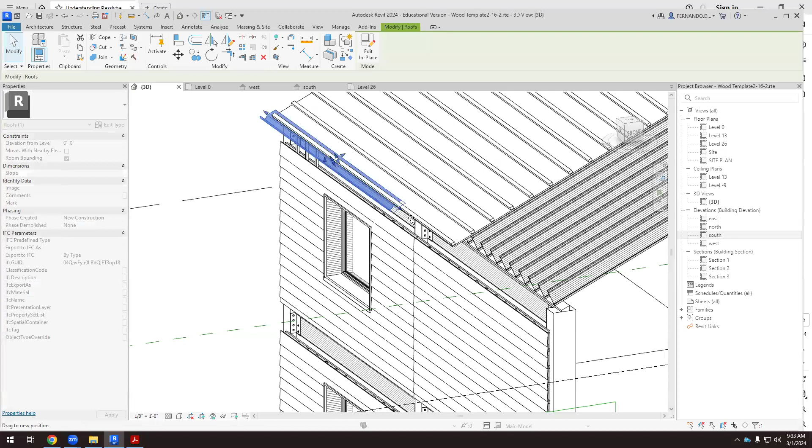Okay, so we have this gutter. It's underneath this element. So if I nail everything together, the horizontal element, the gutter, to the OSB board, we can collect water there.

I'm used to Spanish gutters. In Spain it doesn't rain at all, so probably here you need a bigger one. Okay, anyways.

Okay, so let's look at the front view. We have a lot of things here, so we are getting there. So we have the gutter, we have all these elements. Now we need to create the tiles.

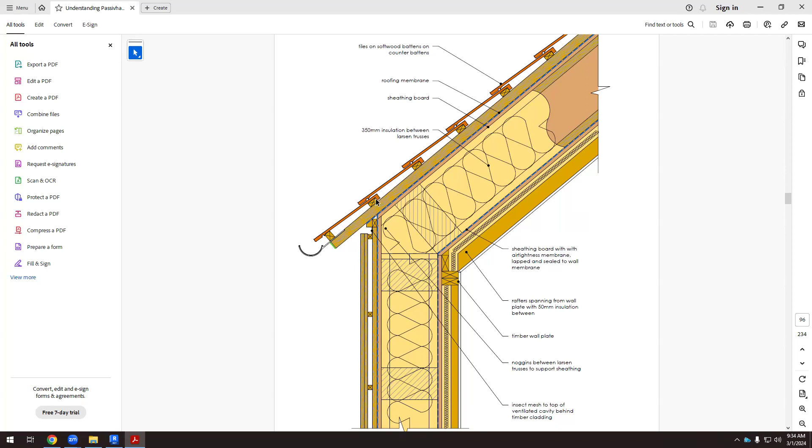Okay, so we can follow this example, those tiles here. You see that the tile is not even nailed, so we have this shape. So we have this element and we just place the tile here. So we don't need a nail here. Sometimes they are nailed, sometimes they are not. If it's a ceramic one, we don't have nails.

And why do we have all these shapes here? Well, because we have to get rid of water. So we can try to trace something like this. Okay, so let's do it.

And yeah, so understanding tiles, it's fun. So first, we're going to create the first row, between this and this horizontal element. We don't have a tile family, so we're going to keep going with the architecture component model in place, roof.

And we're going to set the work plane at grid A again. We're going to use extrusion. So the shape of the tile, okay, I'm going to do this.

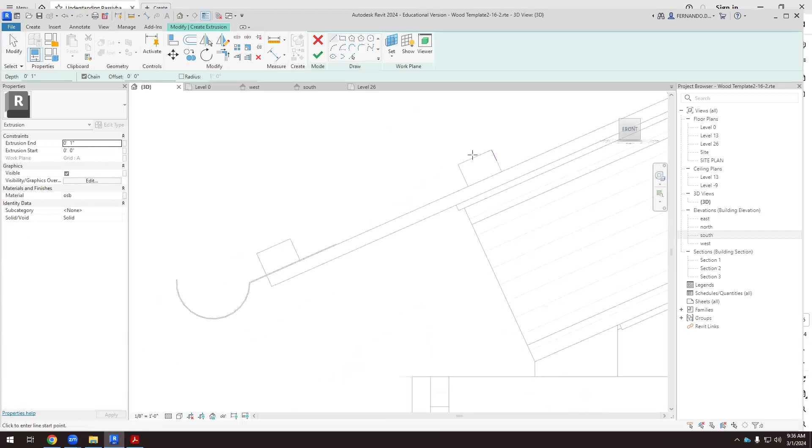Okay, then let's take a look at this. Okay, so we have these. Well, I'm going to create something similar to that one. We don't have to, usually we don't have to define the shape of tiles, someone has already designed it for us.

Okay, so this could be good enough, or well, this is a little, okay. So let's make this a little thicker, like this, and click finish.

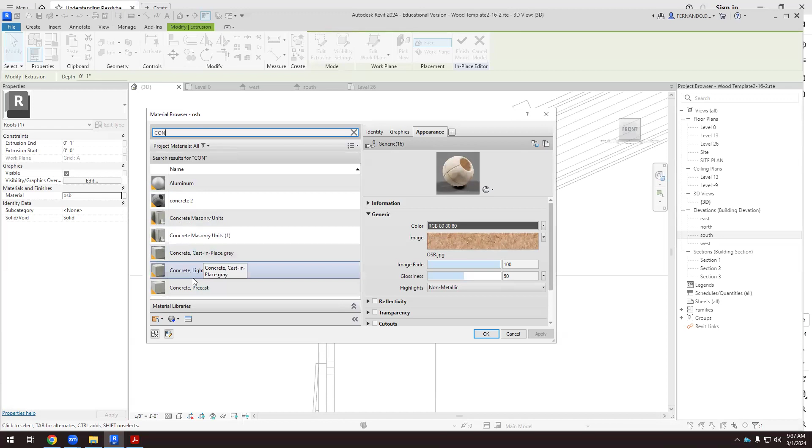Material, it's not OSB. Do we have something made of ceramic? We don't. We have asphalt shingles, but we are doing something better than the asphalt shingle. We can make it, okay, so let's use concrete. I'm not happy, okay, we can change the material later, but let's use concrete so far. I think I created a concrete 2 element, so let's use this.

And let's click finish. Now, looking at the 3D view, the shingle, so it's not something continuous. So shingles are like this. Okay, so what's the width of a shingle?

If we look at the models, that's the section. But if we look at the 3D view, okay, so you look at the proportion of a shingle, and they are overlapped. So the second row is displaced. Yeah, we have this overlap between different shingles, and this is what really matters. So we're going to do this.

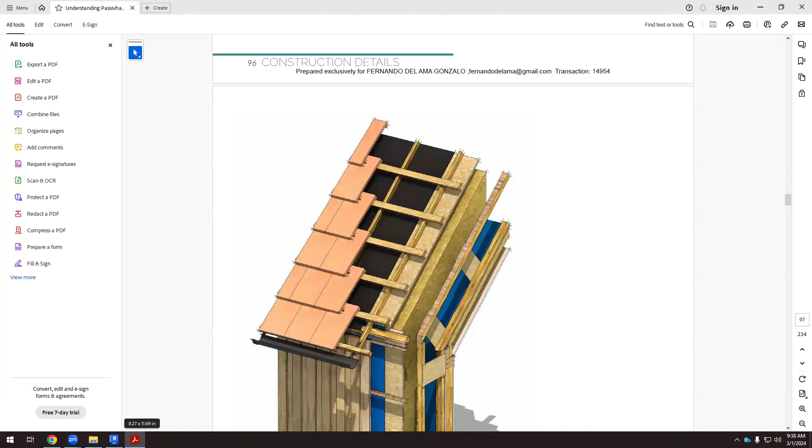Okay, so the width of a shingle can be something like that. And now I can copy these shingles here. If I remove constraint, I can copy all these shingles in this direction. Okay, so on and so forth, you have to copy all of them.

In the next row, it can't be in the same place. So I can go back to the south elevation. I'm going to copy this shingle, copy here. Okay, and you see that this doesn't work because in this row I have to rotate that shingle.

Rotate, place the center of rotation here. And now I have to rotate this here. Oh, cannot rotate element into this position, cancel. Okay, so if it doesn't work...

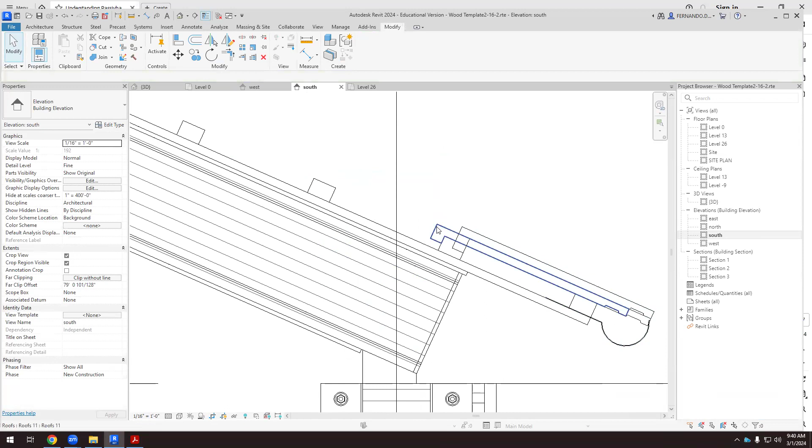I'm going to create a new one with that rotation, okay? Because the shingle has to overlap this one. So,

okay, so I'm going to go to architecture, component, model in place, roof. Set the work plane at grid A and use extrusion. So I'm going to do something similar, but now we need this overlap here, okay? That's why we need this rotation, and then I can have this element, have this, and then have that, and then here.

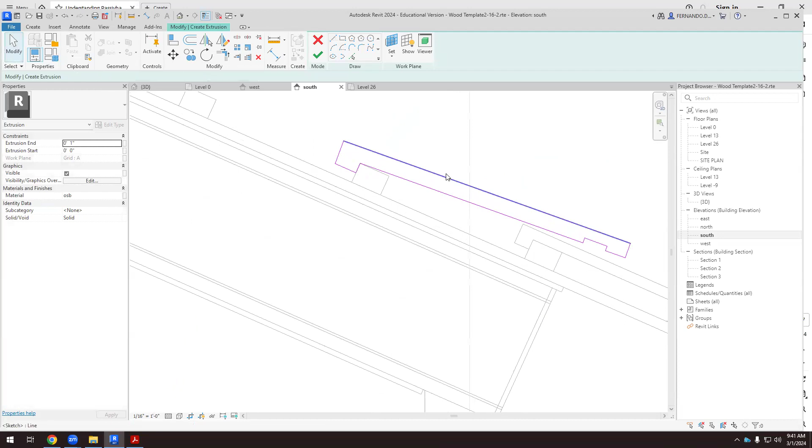Okay, so you see that we need this overlap, so this is slightly tilted, it's not like the last one. That's why in this detail they had this one, probably it's 3x2, but in a different orientation, you see? And then we can copy. We should have done it, but I think this is good enough.

And if we do this, now the important thing is that the shingle has to be the same size as the other one. But we need the overlap.

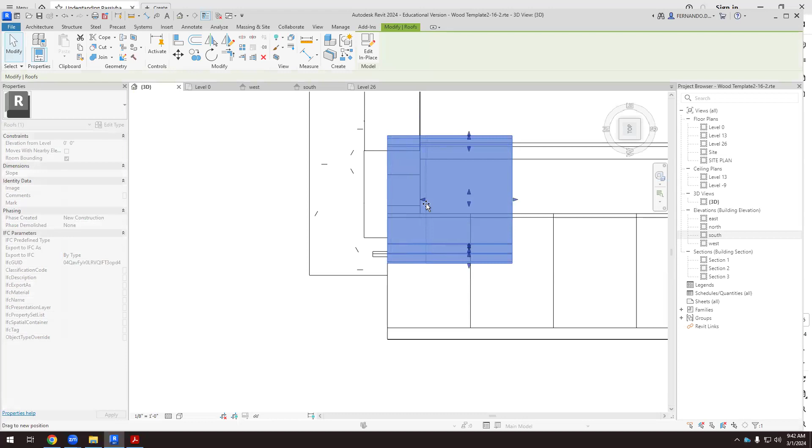When we finish the model, if we move it, okay, moving doesn't work. So we have to move it up to the midpoint here, the midpoint there. Okay, so we need that overlap, and now we can keep copying those shingles or tiles in this direction.

Okay, so it's important that we have this overlap between the shingles. So it's not just copying the same row. We have to displace this, and then we can keep copying.

Oh, I made this out of OSB. Big mistake. Okay, before starting copying, make sure that you change the material, because otherwise you have to change all the tiles. So it's better.

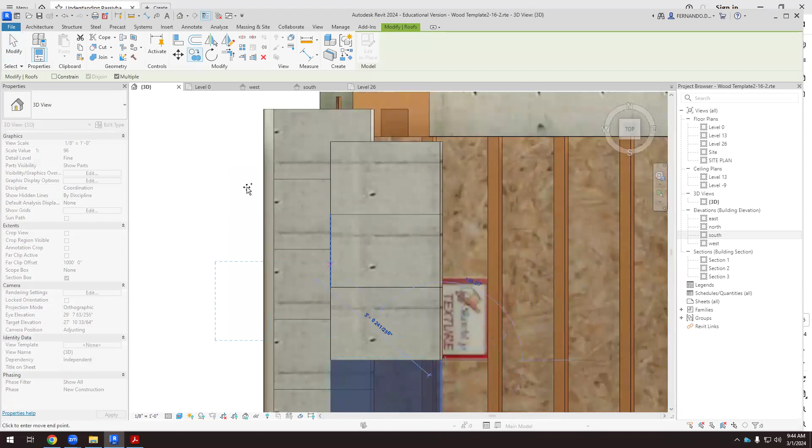Okay, the ceramic looks nicer. It's a question of the material itself. We can go to ceramic texture.

Difficult finding the right one. Okay, so that would be the typical color of a ceramic tile. I can use this one.

Well, I don't know, sometimes the PNG extension doesn't work in Revit, so I prefer the JPEG. So let me see if I can find, okay, so this is a JPEG, I think it will work better. So let's save that ceramic. And now if I come to this, I can edit in place, select it again, change

the material. I'm going to create a new material. The identity is ceramic. And for the appearance, if I load that image, I'm in desktop, textures, open. I want to change the sample size to, say, 3 feet.

Done, apply, okay. Yeah, that looks nicer. Okay, anyway, this is about changing the material of the tile. Concrete doesn't look very nice, but this looks nicer.

The important thing is that we need this overlap between tiles. And the important thing is that we need all the structure to hold the tiles. If it's too windy, probably we will nail the tiles to the structure. If we don't have enough wind, probably it's not necessary. But I think in this place, you have to nail the tiles to the structural element just in case.

Okay, I think we have to finish. And we are not done.